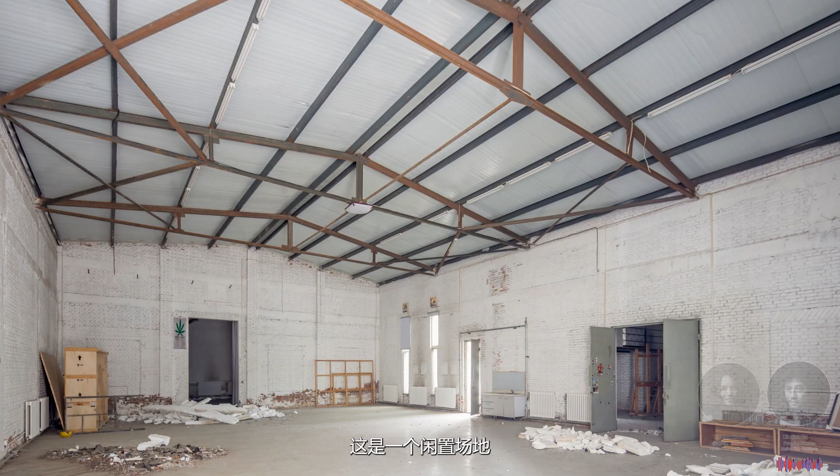The first one is the Yinliang Stone Archive. This is a renovation project from 2015. It's an empty space, and our client is a stone manufacturer who established their business based on a very heavy, labor-consuming industry: stone.

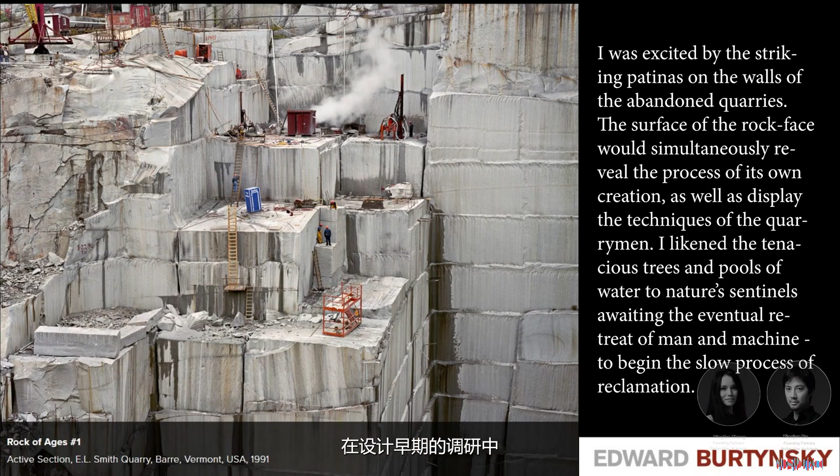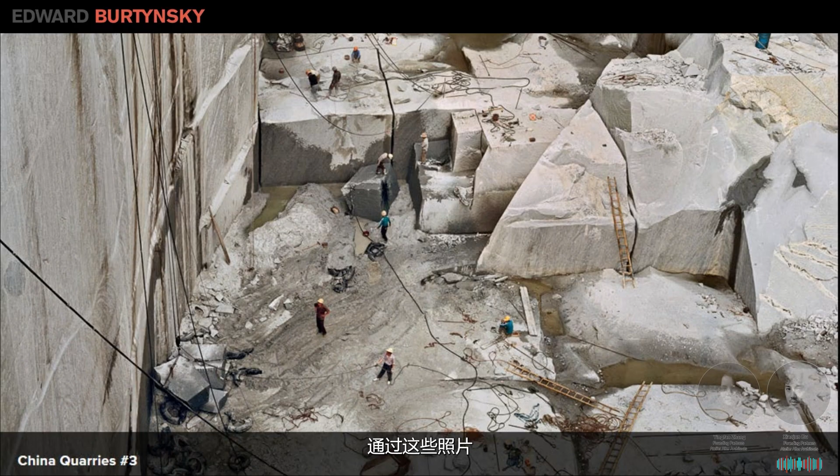At the very early stage of the design, we studied the space represented by the famous photographer Edward Burtynsky. Through these photos, we looked at huge nature scale beyond the reach of human scale. We became very fascinated through these images.

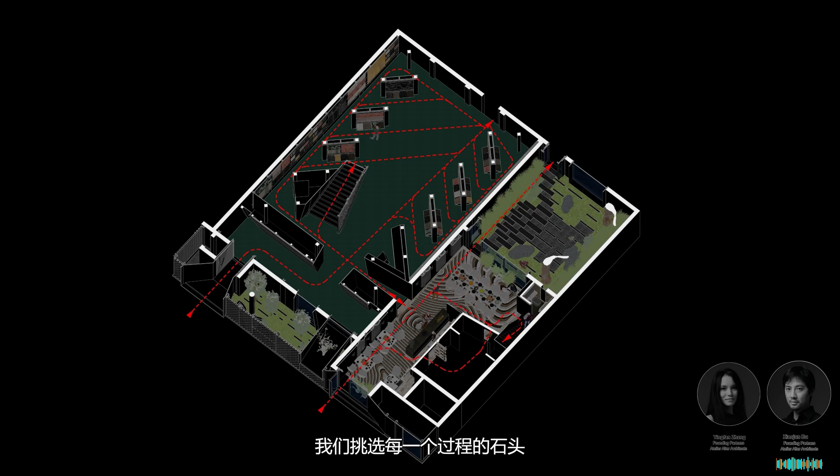We also studied how the industry functions, in terms of how they treat the material of stone from raw to fine. Following the process of the industry, we picked up on each step. Some of the stone is just waste material in their junkyard; we moved it back to the site, retreated it, and cut it into small cubes. Some is just trash from the stone industry, which we reorganized, resliced, and put into a new way of organization in the interior design.

So the whole idea of the design is really to express and articulate the ambition of pushing the boundary of the possibility of stone as a material.

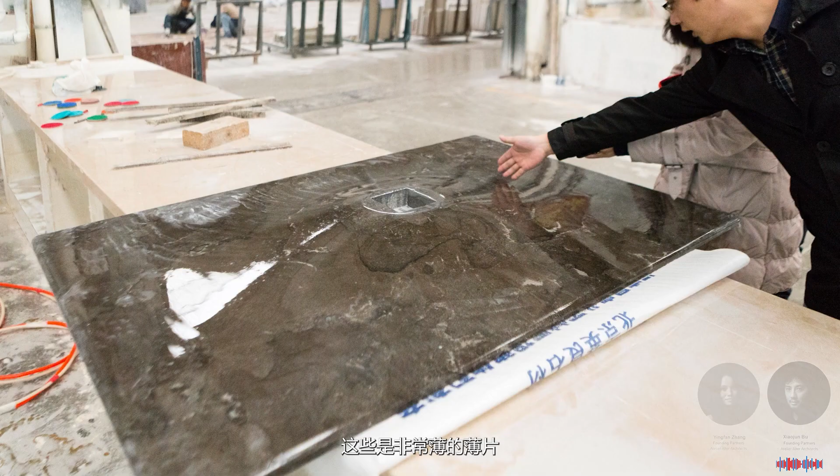These are very thin slices of stone plates. The tectonics of the building interior were developed from the way people treat huge weights of stone — they just split it. So the interior space is very cleanly cut, using the waste material of the stone.

We also used parametric design to express the softness of the stone. The stone is articulated through thousands of triangles, making it feel like a carpet or a softer landscape, expressing also the lightness of stone.

We also looked at a robotic manufacturing way of treating stone, and designed very thin laminated marble lighting. We designed all these furnitures trying to make the stone feel soft and very light.

So the second idea is leading traditional material to a new form of existence. The first project here is the WuliEpoch Cultural Center, which has both interior and exterior landscape.

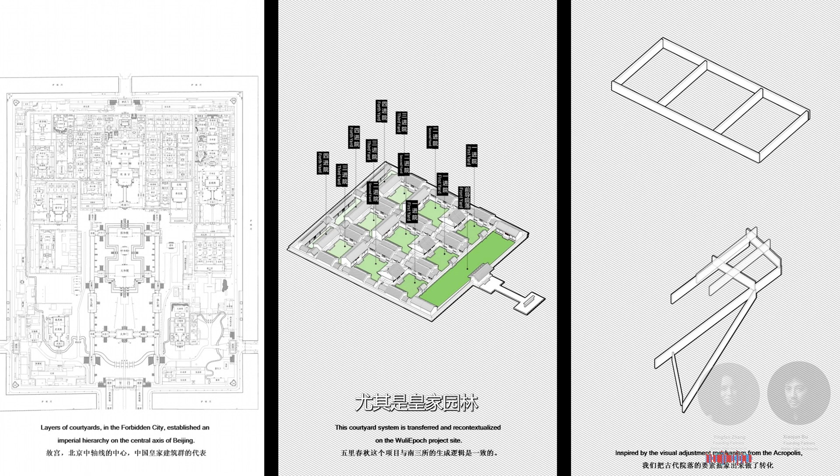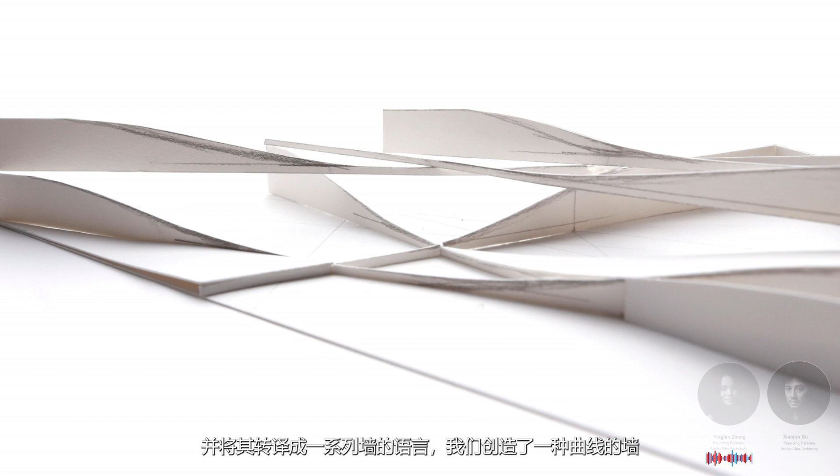We have a 270-degree panorama for the project. The whole project is based on the courtyards of Chinese gardens, specifically the imperial courtyard within the Forbidden City. We used the courtyard language and converted it into a series of wall pieces, creating a kind of curved wall, and with that curved wall we created interior and exterior courtyards.

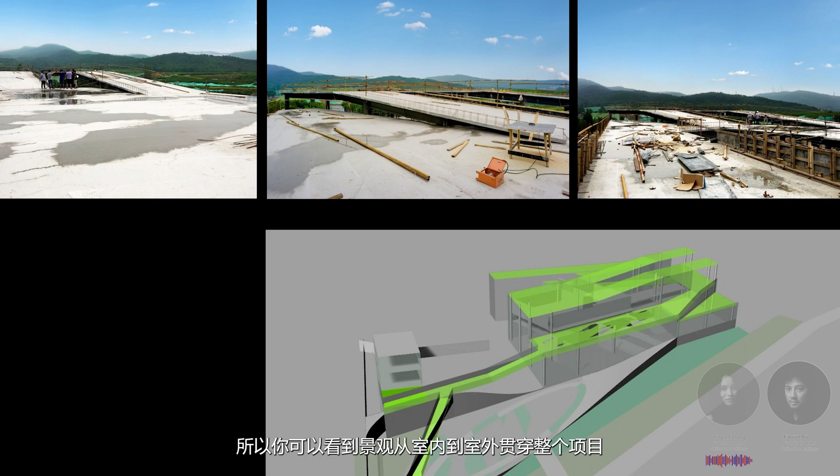This responds to the landscape of the site, with the exterior landscape twisting inside out for the project. The landscape penetrates the whole project from interior to exterior, and the distant landscape is framed within our interior landscape.

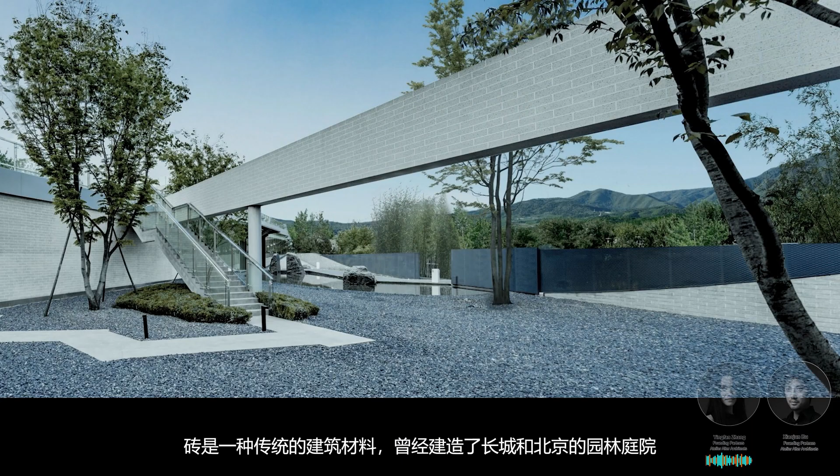You can also see the manufactured brick — the masonry construction — used in our project. It's a new masonry we created, based on the traditional construction material used for the Great Wall and the courtyards of Beijing.

And we also have aluminum panels and masonry blocks for creating a second nature landscape for the interior. And the second nature landscape and the first nature landscape create a sort of dialogue for the project from interior to exterior. It's a landscape inside out for the whole project.

And you can see connection from interior, architecture, and landscape. The three disciplines work together.

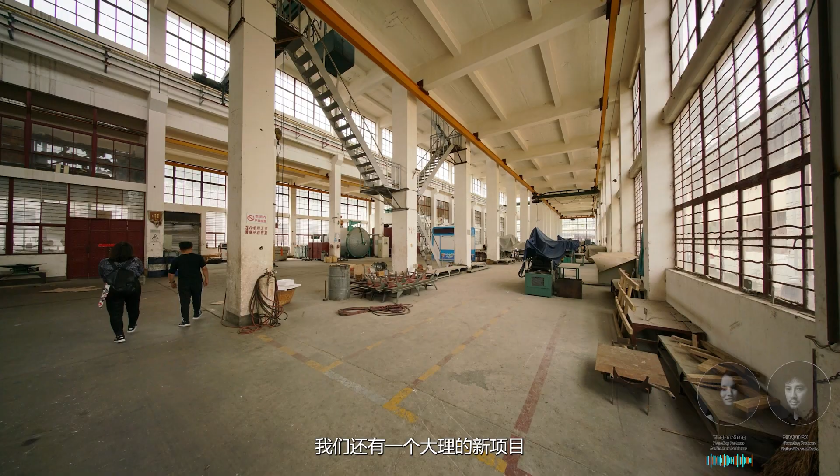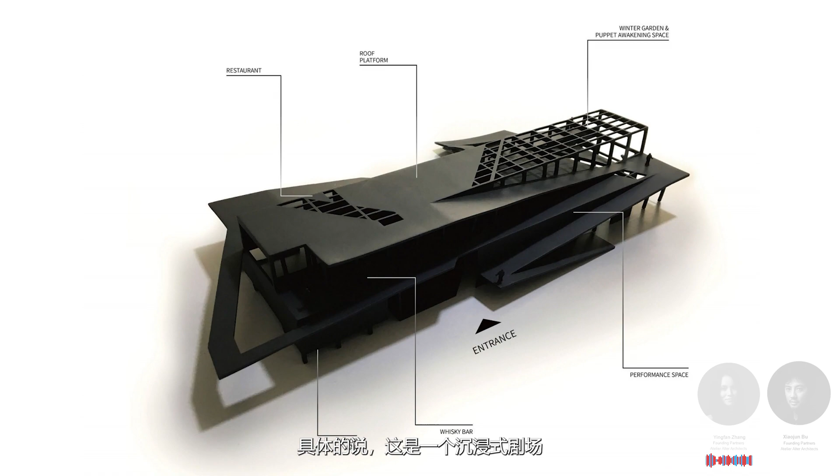And we also have a new project from the Atelier. It's a conversion from a transformer factory into a cultural center, specifically an immersive theatrical district. We have the main theater here, and some backstage joined by different building blocks.

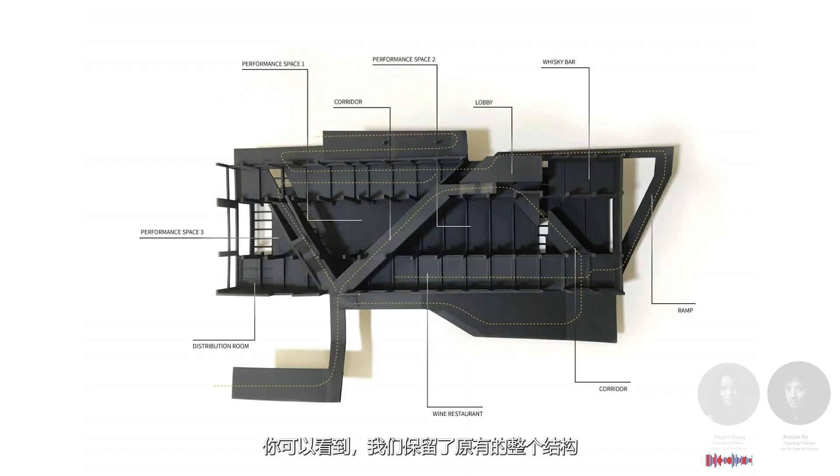It's a conversion from an existing factory into a cultural project. As you can see, we maintain the whole original structure here, and we create a zigzag pathway to the top. We create two kinds of perspective for the immersive theater.

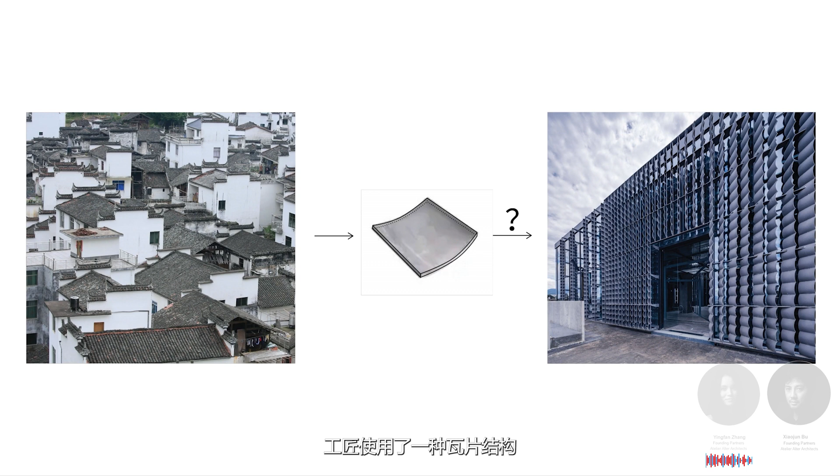In this project, in terms of construction, craftsmen used ceramic tile construction, and we renewed it into ceramic tile with curtain wall. We create a new detail for the project.

And we also have a series of flying paths penetrating through the roof of the original building. We also have some new construction, new structure dug into the existing house, the existing wall, and we have a new created window into the existing masonry wall.

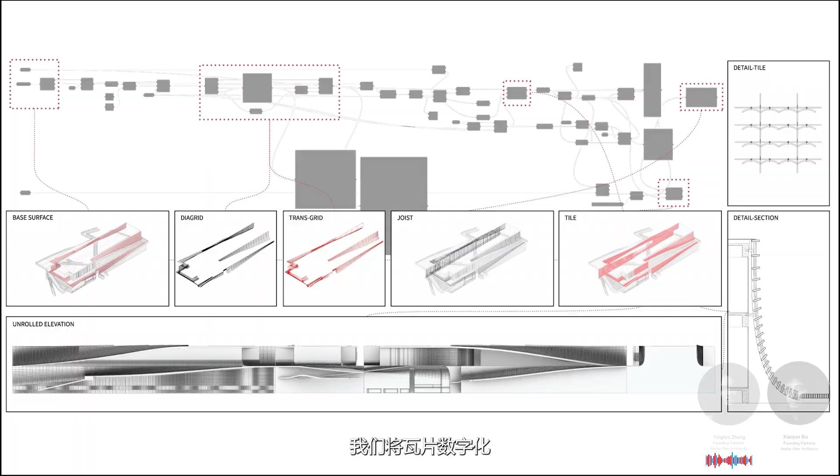In terms of the tradition of the city, we have the tile, and we converted it into this kind of curtain wall system with the ceramic tile. We have the tile digitalized, and we created a new syntax for the construction technique of the city. So this is the old construction, and this is the new construction.

You guys can see that this renovation is seated in an ancient city of Dali. The city has an age of like 1,000 years. So you can see from the pitch roof that all this traditional roof has these gray tiles.

So we use this tile, but apply it on top of the curtain wall, mixed with a very modern way of usage, and also put it on the pavement. It could be very nicely mixed together with the ancient city and the new construction.

Also, the translucency of the marble is also part of the traditional usage of the traditional material from the city, because the name of Dali actually means marble. Dali is from the name of marble.

So we reuse the marble, but make it very seamless to elevate it to a new reality of that old material. So all these slides that we are flying through are trying to use traditional material, but mix it with a new age of our modern society.

So we have also some interior design, but this is all part of the stage design. It's a very modern way of how we rearrange modern life. So there's a stage design. A lot of young people will go there and enjoy the performance of modern art.

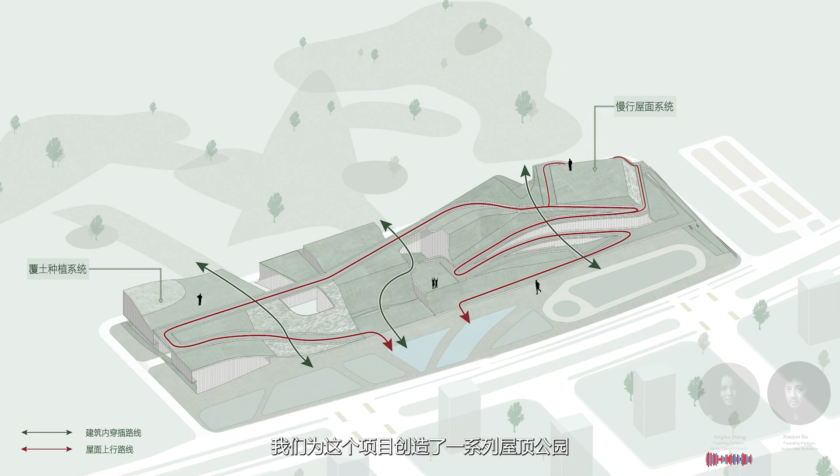Yes, we have a pathway system on the roof of the project. We create a rooftop park for the cultural center. And beneath the cultural center, we have 4 sectors: the library and the showroom, the theater, the swimming pool, and also the basketball court.

And the whole design is based on some syntax transformation from the ancient Chinese bronze technique. We reinterpret cultural artifacts into the construction material. We use this marble and ceramic blocks to mimic texture of the ancient metal.

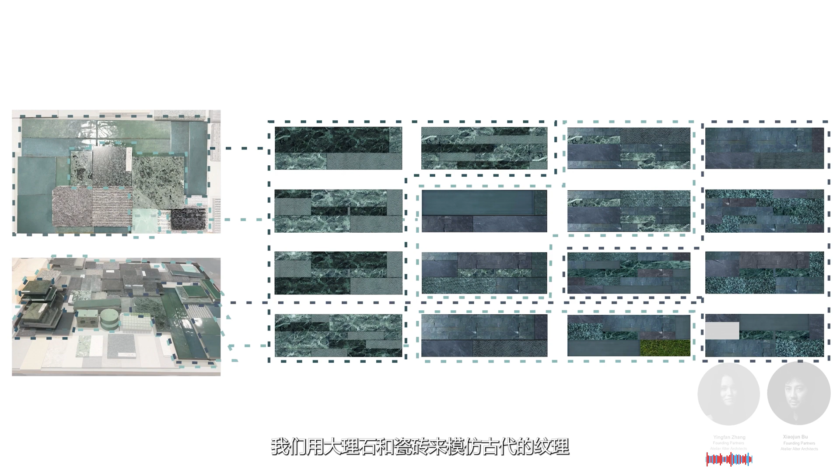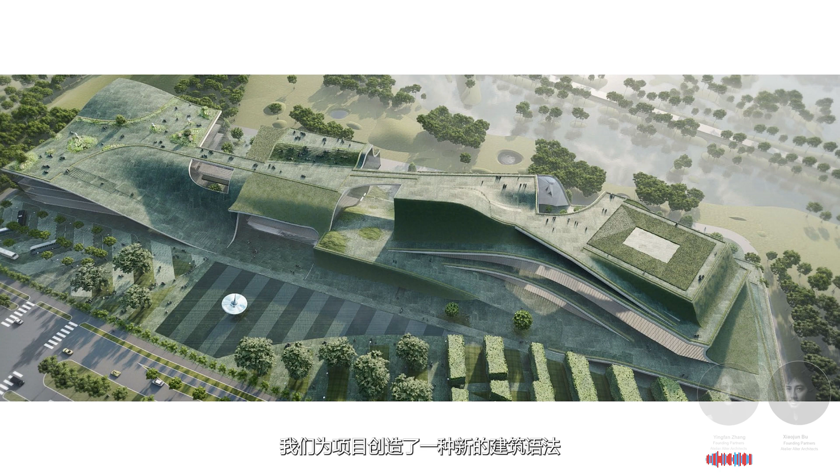And we create a different kind of panel for the landscape, surface, and the curtain wall to create a kind of new construction syntax for the project. This is what we have on the landscape of the project.

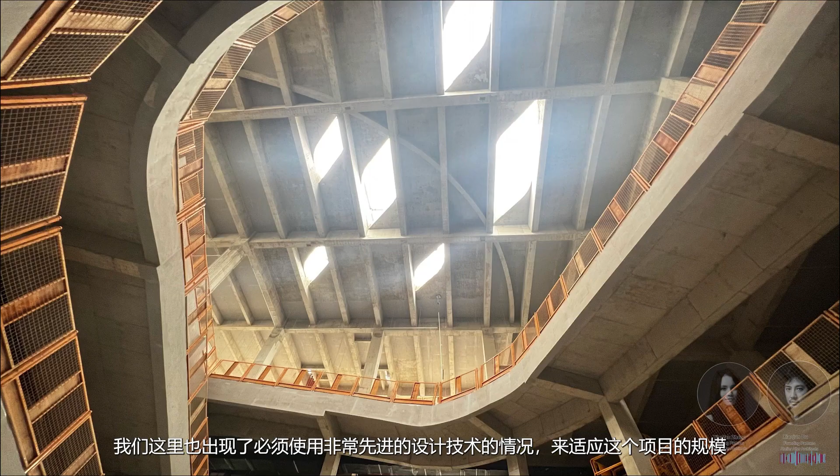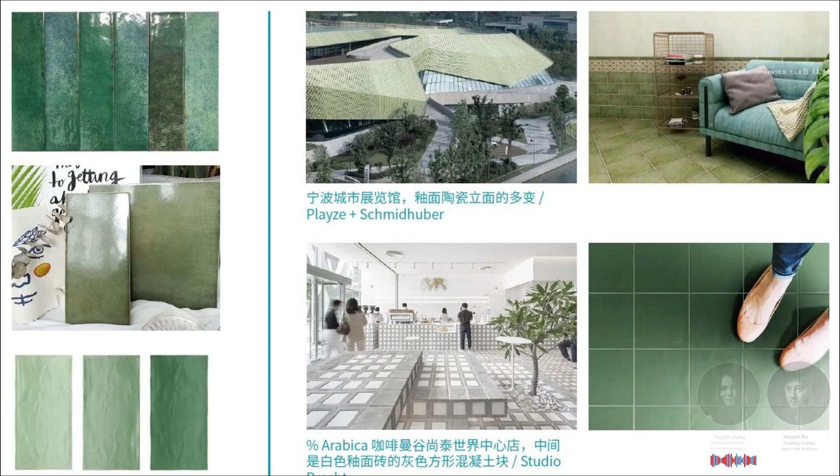Now it's at the final stage of the curtain system. Those are the materials. Okay, that's for today. Thank you.